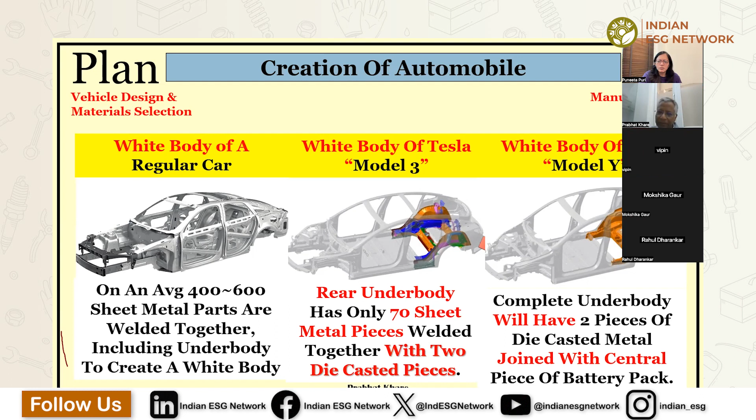So the whole welding shop gets eliminated, and then the waste gets reduced. At the end of it, when the vehicle comes for recycling at end of life, because there are no joint parts, you can straightaway compact the body and melt it - it's pure aluminum which comes out. There are no spots, no welding, no joints. So this is pure aluminum which comes out if you melt the whole thing. This is how it was shown in one of the presentations - this three-part casting.

So it has a better recyclability index over time compared to conventional vehicles. This is a concept which Tesla has brought in, and now Toyota is also trying to follow this, and slowly probably this will become conventional, and all other companies will follow. So the recyclability of the white body becomes much better.

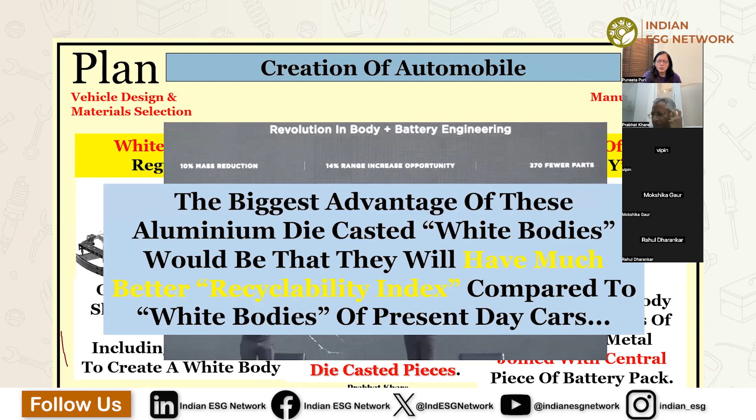Now, with EVs coming in, there is the challenge of battery waste and battery recycling at end of life - not rather end of life, but maybe end of second life. From the vehicle, it comes out and then goes into second life use, and then you recycle the battery. So Tesla is also one, because Tesla is a leading company in electric vehicles, so they are redesigning the battery. About a year back or a year and a half back, they literally came out with a different kind of battery.

Conventionally, we use either the 18650 cell in the current Indian market - everywhere it's filled by 18650 cells. Ola is going for 2170, which is a second type of cell, but Tesla is going one step higher, which is the 4680 cell. So it becomes a much larger cell, and in the car, the number of cells becomes less for the same power, same energy. This cell which Tesla is planning to make is 5 times more energy - it will give 16% more range, and it will have 6 times more power.

And the numbers will also get reduced. At end of life, suppose you have 18650 cells - they have about 300 or 400 cells in the car. So if you move to the 4680 cell, the numbers will become literally half or one third of that. So at end of life, you have to handle only one third of those cells. So a few things will happen with this kind of improvement: cell life will become longer, handling of cells at end of life becomes more convenient, and you have less wastage coming out of the vehicle at end of life.

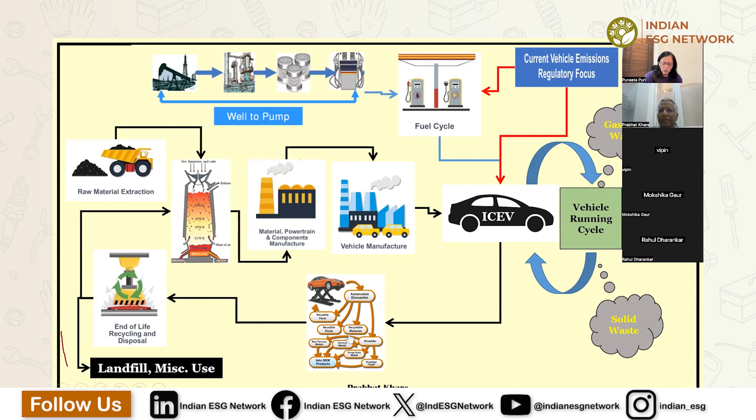I'll show a slide for electrical vehicle too, which is more or less similar but with some differences. If you talk about the whole ecosystem of an automobile, you have a fuel system, manufacturing system, regulatory system in which you control emissions, and an operating system through which waste comes out - liquid waste, solid waste. At end of life, you have treatment, and then it goes for landfill or goes back to the manufacturing system again.

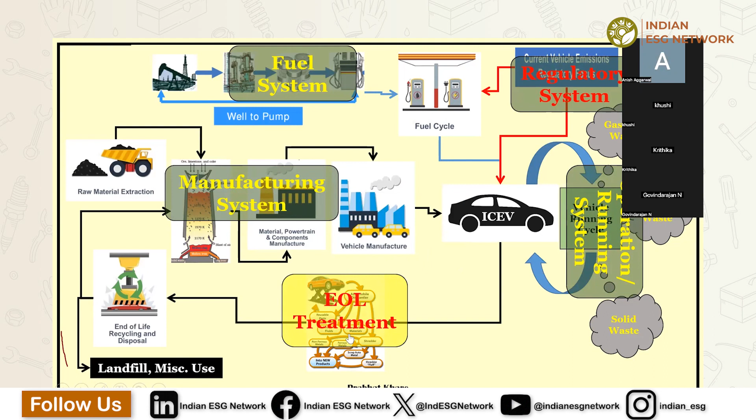Okay. And somebody was trying to speak, right? Okay.

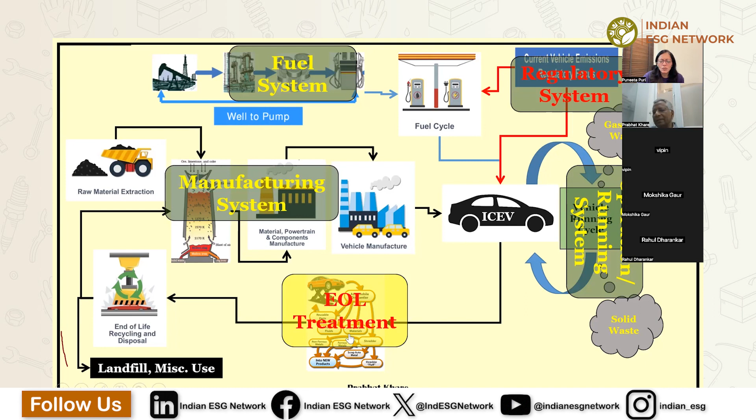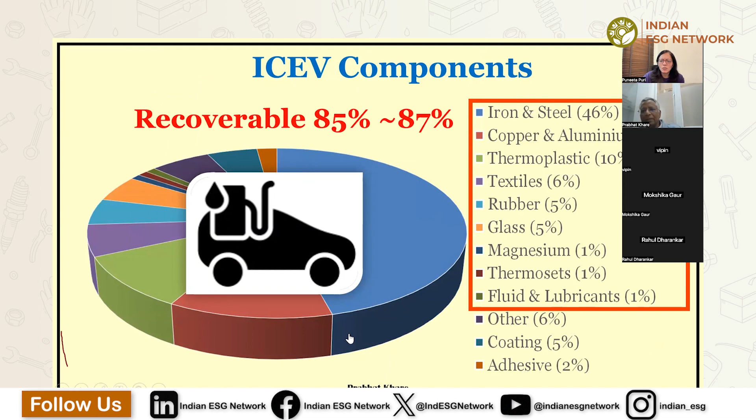This whole system - we talk about the life cycle of the IC engine and this component. At the end of life, roughly it consists of these kinds of material. I've taken an average of cars, trucks, and the whole automobile from the internet. If you talk about recoverability of these parts at end of life, it's about 85-87% that can be recovered - broadly copper, iron and steel, thermoplastics, textile, rubber, glass, magnesium, gas and liquids.

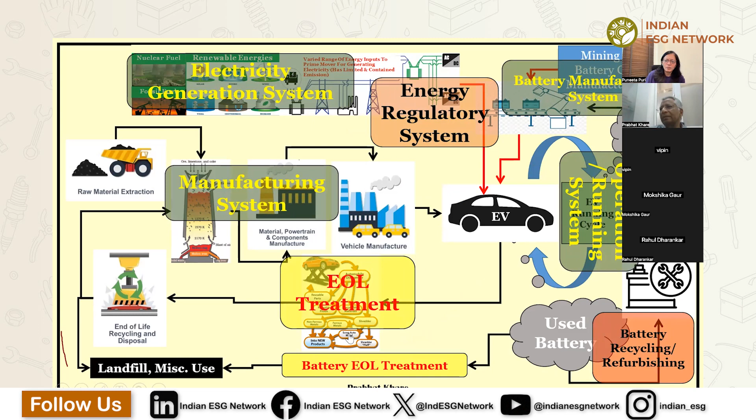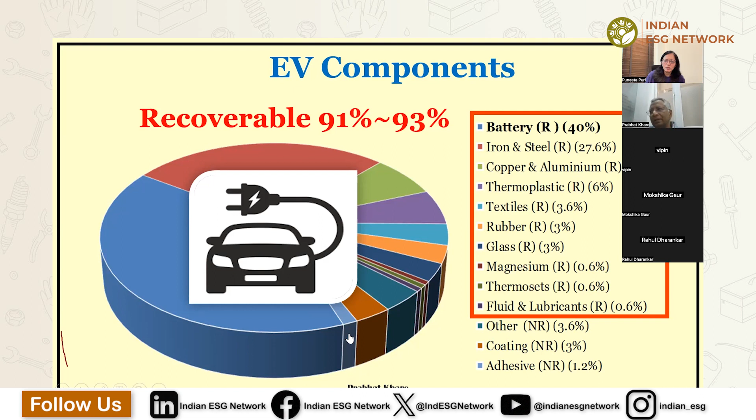In an electrical vehicle, the battery roughly constitutes about 40% of the waste of the vehicle, and about 91-93% can be recoverable if you do a thorough job, which I'll cover a bit later. So about 90% of items can be recovered.

In a battery, if you talk about a lithium-ion cell, 96% of it can be recovered. The case, cathode, anode material, everything can be recovered. So the battery can be recycled up to 96%. With black mass and those kind of processes, you recover anode and cathode material.

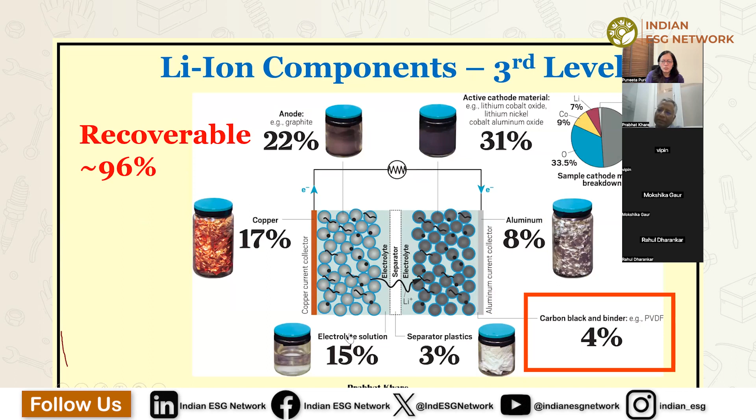But the question is, why should a vehicle become obsolete? Because wear and tear is okay, aging is okay, but then why should it become an obsolete vehicle? That's the question I'm trying to summarize here.

So it becomes obsolete. Then there's the possibility of non-availability of spare parts. Suppose some vehicle was made in 1970 and today you don't have a spare part, so you can't run it in case that part goes out of order.

Then there's theft and stripping - people steal it, cut it, and leave parts of it, so it becomes a spare part. Then there's natural disaster, like an earthquake, where many things get damaged, and lack of maintenance. Then there are environmental challenges, which I think we all know - pollution control and emission norms are coming in India.

The last one is that at a certain point vehicles can't be maintained. Suppose you have a 50 year old vehicle, the maintenance cost becomes more than the vehicle cost itself. So these are the factors which lead to vehicles becoming obsolete.

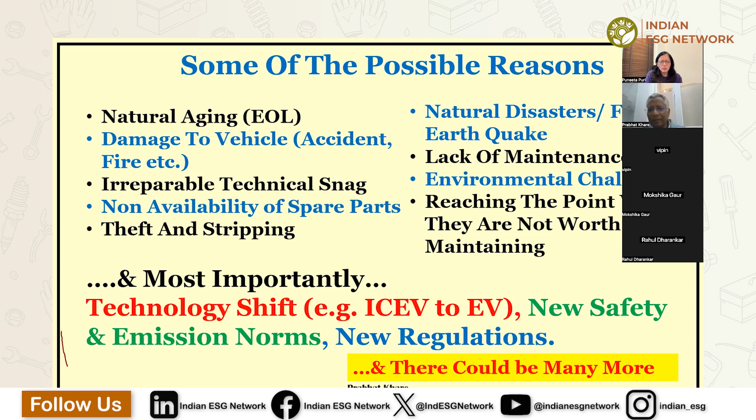If an older vehicle doesn't have these, the government will not allow them on the road because they become a safety hazard. So then you can't take out the vehicle. So what do you do with those vehicles? You have to go and get it recycled or sell it to some scrapper.

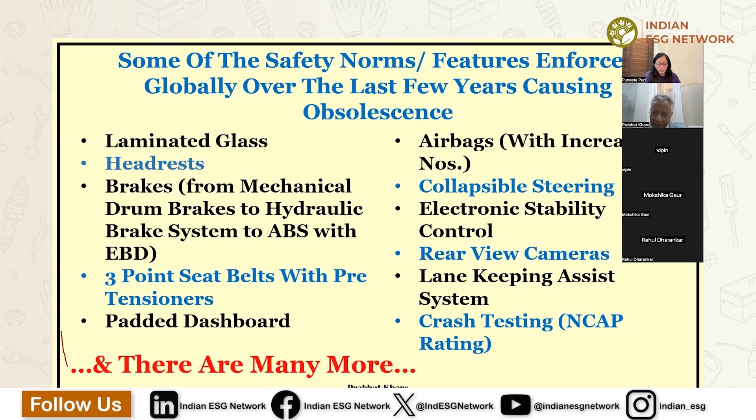RDE is a real time driving emission norm. Any vehicle has to record this emission data in its CPU, and the government can check that performance anytime. So it is a real time emission norm, especially for commercial vehicles - it has become mandatory.

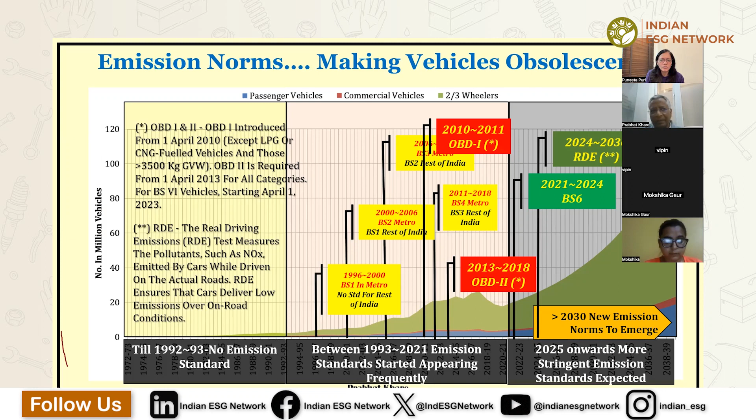In fact, if you remember last March, April, there was a lot of issue from all OEMs because of this norm only - they had to modify the whole tailpipe emission system.

So why do we recycle a vehicle? We saw that vehicles become road unworthy. So you try to take out the material, go back to the loop, and then try to reduce the virgin material fed to the industry, so that you draw less from nature.

Also, there are many hazardous materials in automobiles. You have oil, gases, refrigerant gases, and many other things which, if left open in the atmosphere, will damage the soil and water. They will lead to contamination of everything, even human health. So they have to be taken out properly and contained somewhere. That's why recycling has become important.

And with the numbers going up, the complication is increasing. In India, roughly 12 to 18 million vehicles reach their end of life every year, and about 70% of metals can be recovered and put back into the industry.

There's a report from CSE, an NGO called Center for Science and Environment, which came in 2020. It says that by 2025 - I don't know how accurate these figures are - about 1.2 million commercial vehicles will be coming out, and 22.58 million vehicles will be coming out for scrapping, off the road.

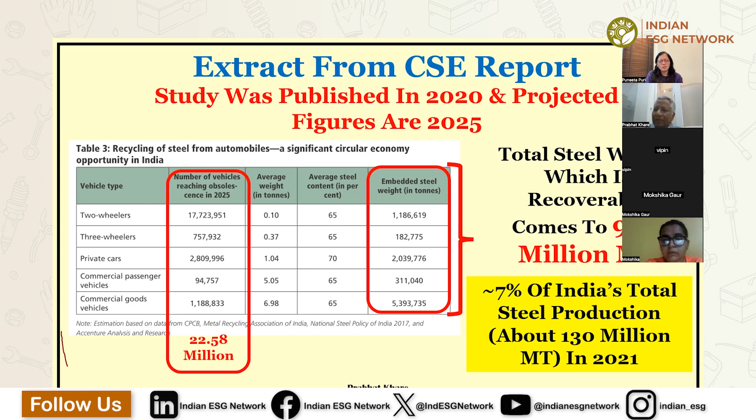So that's the impact on the commercial part when you talk about recycling of automobiles. This is one example, but you can extend it to any other material also - you have copper, foam, plastic, tire, glass. The percentage can vary, but this is the kind of weightage you have.

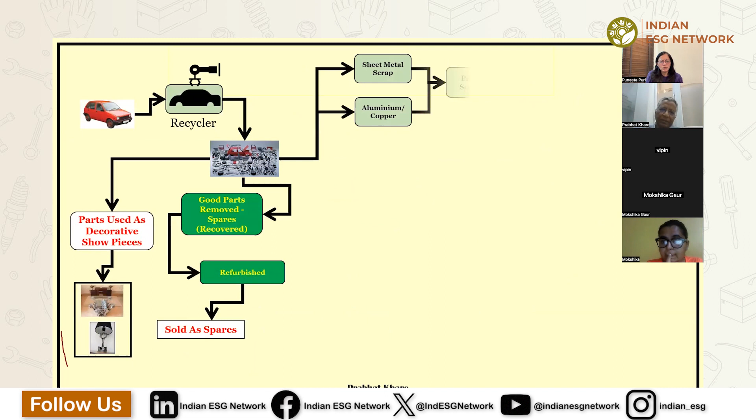You have a vehicle which comes out, then you remove the good parts. Probably it doesn't happen in India - it is not allowed properly in India - but in other countries it does happen that you take out good parts, refurbish them, and then sell them as genuine spare parts for secondary use. These parts are primarily non-functional parts, like seats, bumper, dashboard kind of thing, or maybe a handrest, or anything.

But in other countries, they also refurbish engines, shock absorbers - they do many other things which are functional parts. They are certified, tested, and then resold as genuine spare parts for secondary use. Sometimes people take out some material and use it as a decorative item, like an art piece. Some people do that.

Then steel and copper material, they separate out. It goes to the scrap metal market, goes to the steel processing unit, and comes out again as steel ingot. Gases and other things are retrieved and reused. Rubber is taken out - discarded tires are dismantled, separating the rubber lining and steel part, and then recycled or retreaded, and either sold as a secondary tire or given to a tire company for recycling.

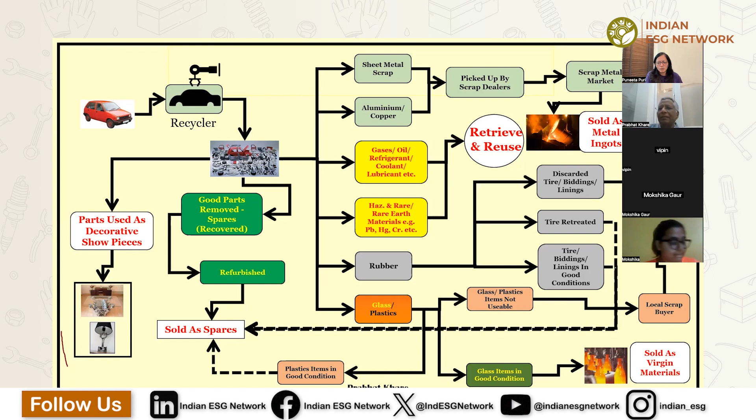Glass is again taken out - it goes to the glass processing unit and comes out as virgin material. Plastic items which are good again go out, sold as spare parts. So broadly, this is the kind of thing that happens when you talk about automobile recycling.

Unfortunately, what happened in India is that numbers were stagnant till 1990. There was no market for recycling, so it was left to an unorganized sector which was taking the vehicle, cutting it out in the open, and then dismantling it. Probably you've heard of Mayapuri in Delhi, known as the world's biggest graveyard of automobiles. This was all a manual process, no automation. People were cutting it with bare hands, getting exposed to oil and different kinds of gases.

But slowly things started improving in the last 10-15 years. Probably in 2018, things started changing in India when the government created a portal, the e-Parivahan kind of thing. There is a scrap portal, not a very perfect portal, but it gives certain information. You can find out the people who are recycling vehicles, there is a list of people. It's called RVSF kind of thing, and they have put up a manual of how things should happen.

There are 48 companies in India as of now registered to handle vehicles. They're called RVSF, registered vehicle scrapping facility. They are in operation, so details of these companies can be taken from that portal - the contact number, the contact person - so people can approach them.

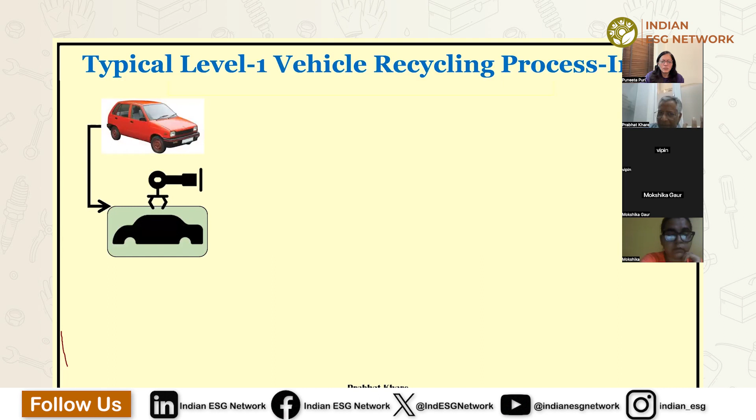They do the first level of scrapping - they take the vehicle, dismantle it, and give it to secondary agencies who treat the metal at the next level. So there's nothing like an integrated facility in which a vehicle goes in and comes out as different metals. There are challenges because recycling is done only at the first level - dismantling is done properly, everything is done properly, but the handling of the second level of treatment is not there in India. It goes to the unorganized sector, or probably somewhere there might be an organized sector, but as far as I understand, it's 80% unorganized sector which takes the metal from these RVSF and handles them.

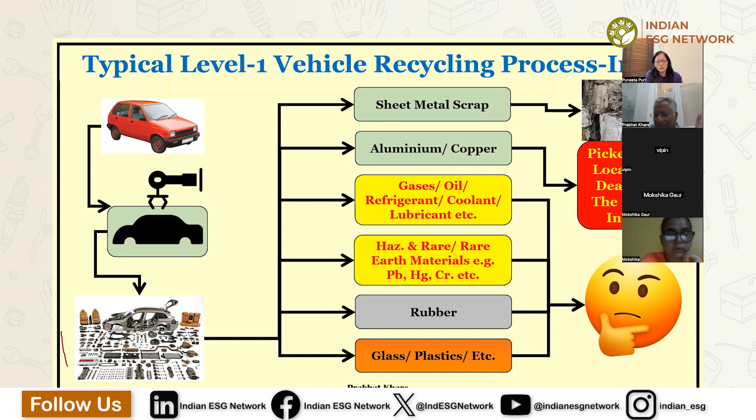But compare this to Toyota, one of the companies which has taken this recycling facility to an extreme level. I'm sharing a flow chart of Toyota in which the vehicle comes for recycling - and it's only their own vehicle, they don't handle other vehicles, only their own vehicle at the end of life. So the vehicle comes for scrapping, they take out the ferrous and non-ferrous metal, then they go for auto shredder.

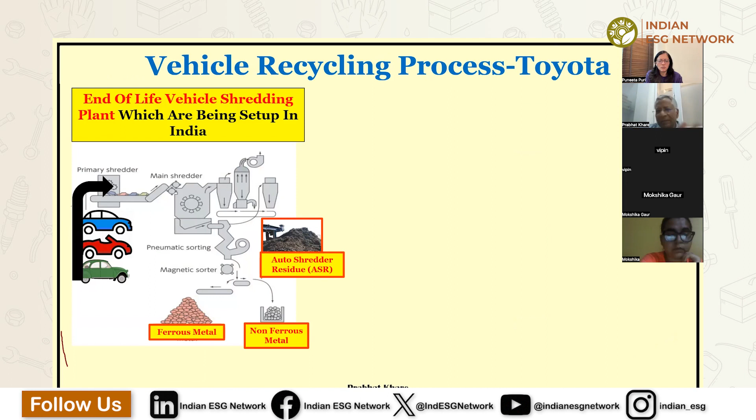This is a facility we also have in India. When we talk about RVSF, this is a facility we all have. Most of these RVSFs have this kind of setup. Toyota takes it forward to the second stage. At this level, you usually recover 70-75% of material. Toyota takes it to the second level.

They call it ASR, Automobile Shredder Residue Recycling Plant. Here they do the second or third level of treatment in which they take out everything - aluminium as a separate metal, non-ferrous metal, glass separate, urethane foam separate, copper. They go up to the metal level and take it out. So about 85 to 95% of the vehicle's metal can be recovered.

So this is what is missing in India. ASR facility is not there. Probably it will come in time, it is too early in India.

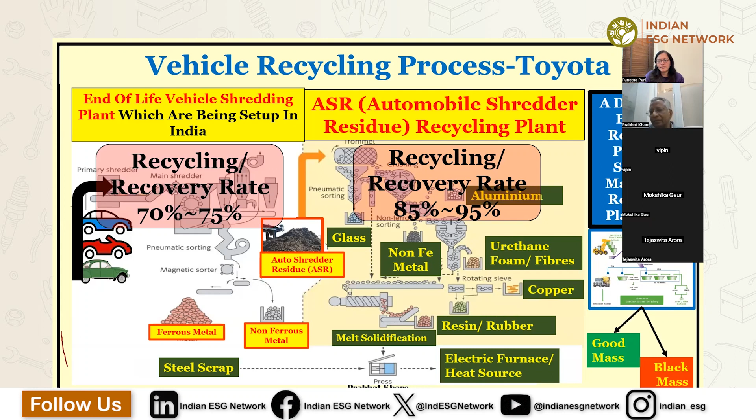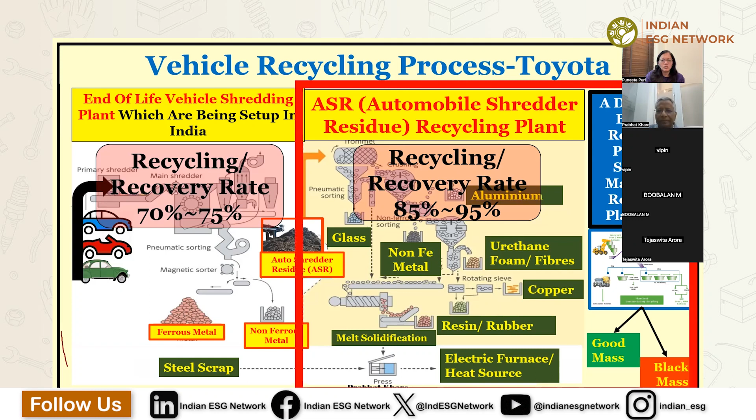And when you talk about battery electric vehicles, there has to be a dedicated battery recycling plant along with the main recycling plant, which, as far as I understand, is not available anywhere in India because batteries have not started coming in for recycling yet. You take out the black mass and recover the basic metal from the battery. So this is yet to come. People are working on it, but it will probably take more than 5 years to come in. This is what is missing in India - this is still not there, the red box.

Some challenges in creating circular economy in India: there are no standard guidelines for auto OEMs for their supply chain, because everybody has ISO 14000 or whatever standards with the OEMs. They manage it till tier 1, tier 2 supplier, but going up to the last supply chain is very difficult in India, because many times the last person in the supply chain is probably an SME kind of agency which may not be following any environment regulation. So it becomes a challenge.

There is no properly integrated system to track and account for non-functional vehicles. Now it is starting. It was not there, but now with the new number plate system, the HSRP, high security registration plate, they know which vehicle is made in which year, and it is more computerized. So RTOs are becoming more progressive in tracking vehicle age. But we need to integrate many databases like RTO, FASTag, insurance policy, all those insurance systems. Those things have to be integrated, and probably these things are moving in the right direction in India.

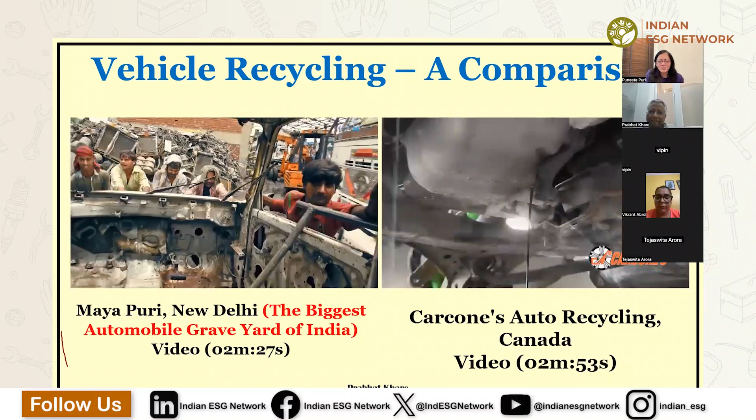You just compare how things are done in advanced countries and how we were doing till 5 years back. Few things have improved in India, but it is not as good as other advanced countries, because in advanced countries they have been doing it for quite some time, almost 30, 40, 50 years.

So if you see this Carcone's Canada video, they are tagging each component which is reusable, and then they are sold as a secondary part to the second market. When the engine, gearbox, shocker, everything is tagged, numbered, with an age life, it is sold in the second market, a certified second-hand market kind of thing.

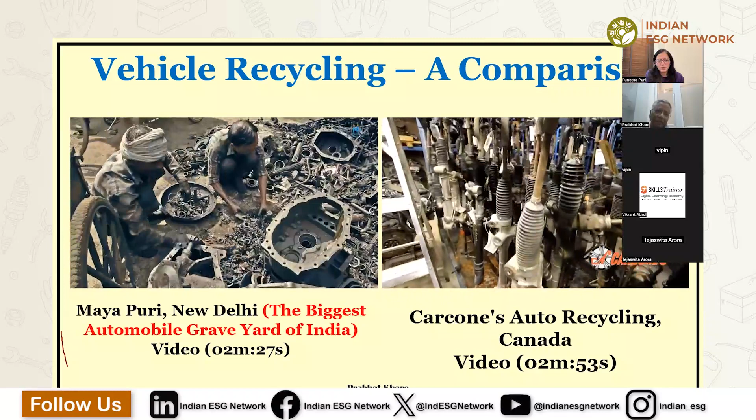And in India, if people handle this kind of thing by hand without safety precautions, they are exposed to a number of diseases. They are exposed to hazardous material, and medical issues are there.

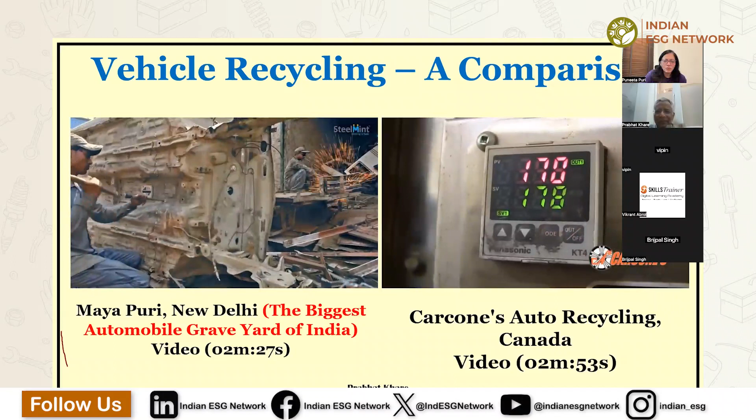I don't know whether you're getting the voice, video, or sound or not. I'm not sure. I'm not getting the sound. So the sound is not there. Now I don't know why it is not there. Okay, probably now it is coming, right?

This is tire rim. Tire rim is again refurbished and sold in the secondary market. Many components are taken out and then restructured and sold in the market. But in India, we have not started this kind of business.

So this is it. This ends my thing. Probably 45 minutes was okay, a bit early.

I think it's pretty good and a lot of details, though many technical things we wouldn't understand on the technical side, but it gives a very good overview of what's really happening in automobile. Any question? I can take it in between.